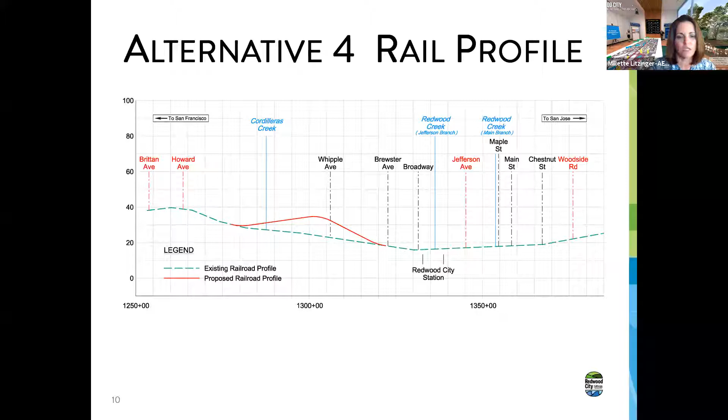And then how high? So this last slide shows what the height of the railroad is at each of the cross streets for the 4 alternatives. It's summarized in this table.

You can see the rail height is the difference between the new proposed track and the cross street below. In alternative one, for example, the tracks are elevated throughout the whole city, so you can see the heights range from 23 feet at Whipple to 6 feet at Chestnut.

Conversely, alternative 4, which is Whipple only being grade separated, you only see that as having a 9-foot increase, and then all the other cross streets have no change in height, so there's 0.

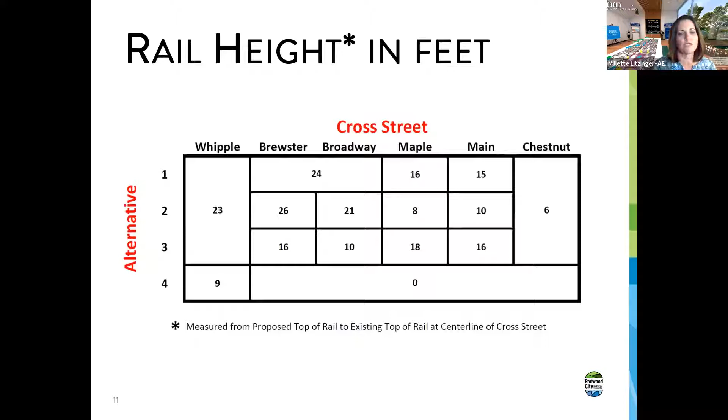I just had one more slide. Sorry, Eileen. Just wanted to highlight that a lot of the 4 alternatives we're looking at do introduce the idea of closing some of the streets.

I just wanted to add one thing. The profiles that Millette is showing, and also seen in the VR room, those are exaggerated 50 times, so they look like roller coasters, but those grades are generally very flat. 1% is the maximum we're using.

So when you're riding on that train, you could barely notice a steady climb. It's a long, steady climb. That's how we get the elevation differences that she shows on that table.

Thanks, Peter. Spoken as a true engineer. I love that. So thank you for that.

While we have this slide up, I think it's a good time to ask Millette another question that's come in. As I mentioned, we're going to be posting additional traffic information, but there's already some information. There's been a question asking where can I find more information on the traffic impacts? So Millette, can you share how that might be done or where that is in the virtual room since we have that open?

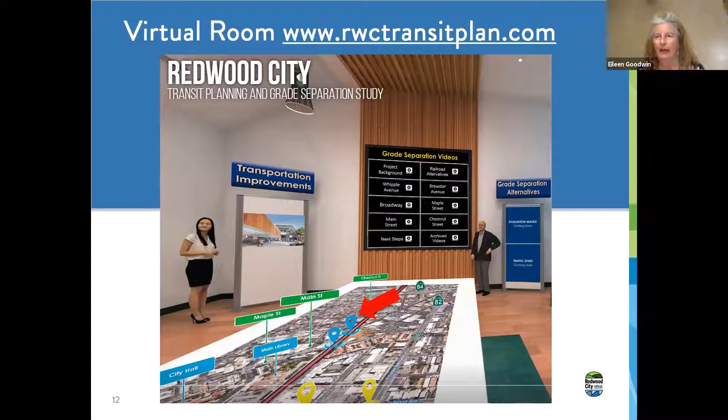Yeah, and this is a screenshot, so I'm going to stop sharing here and ask Peter to start sharing the virtual room link there too, so we can live click on some of the exhibits there. But as he does that, I can start to explain.

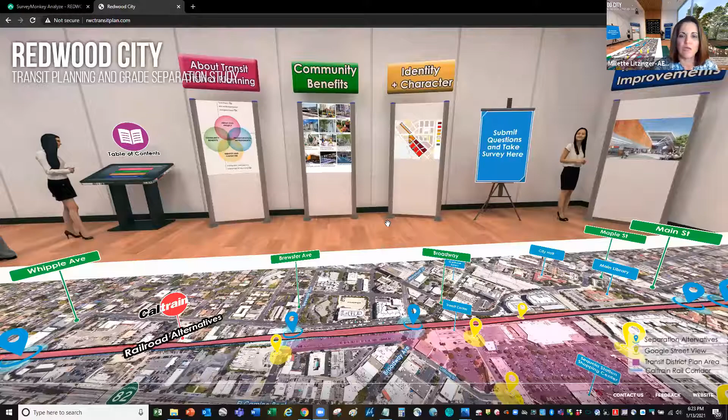We do have information on what the traffic impacts would be as it relates to the existing traffic volumes. And when you go in the virtual room, Peter's going to pan over here to the right, and then you can see an easel board over here where the grade separation information, not only our videos, but some of our documents are starting to be populated.

He can click on the existing traffic link there. And even though we are working on the traffic analysis for the 2045 volumes, we'll update that in this room prior to our next Q&A session, which will highlight the results of the traffic analysis related to the future year of 2045, whereas this one just relates to the existing traffic volume counts.

I'm probably going to have you leave it there, Peter, because I think that probably will also be our next topic. Good. Yes, I'm starting to get some feedback from our Q&A function.

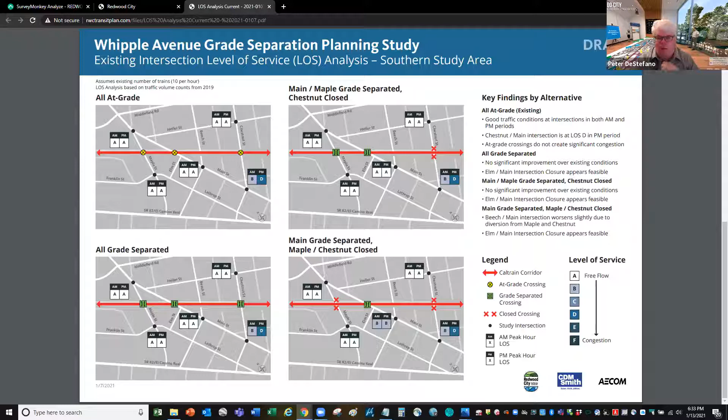Yeah, we have some options, and you can check it out in the VR room at Chestnut, at Maple, and at Broadway. Take a look at the exhibits there, and you'll see, actually at Brewster too, that we're developing as we speak. But yes, there are some cases where we're showing what-if scenarios of pedestrian and bike crossings only.

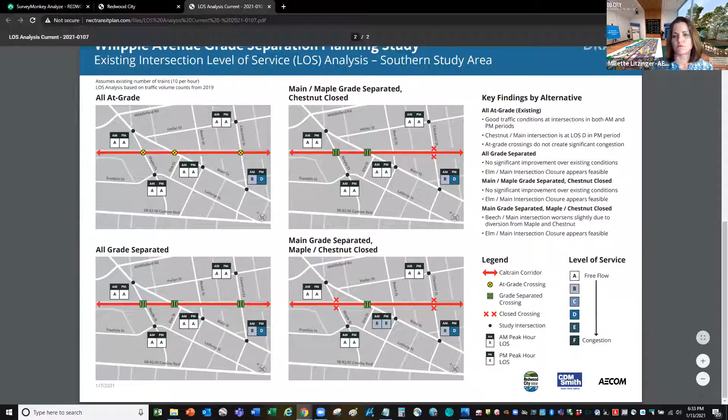Great. Okay, so Peter, can you show us one of those on the website? Yeah, that would be great. Sure, let's take a look. Let's look at the one at Chestnut. rwctransitplan.com.

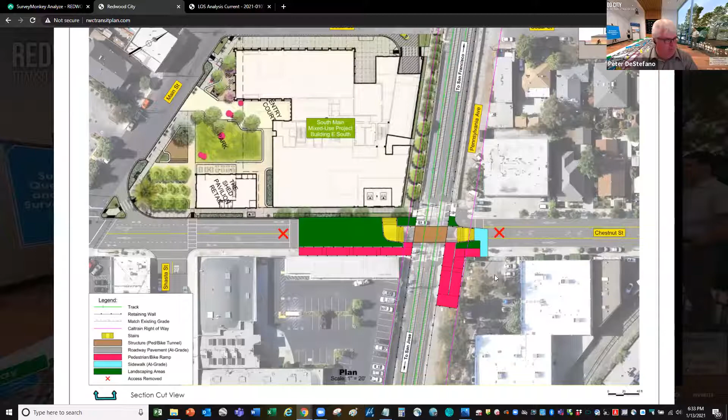So here is the one at Chestnut. This is showing a closure. The X is showing a closure for motor vehicles, but the red areas are the pedestrian ramps that descend down into an undercrossing, and the yellow areas are stairways that climb back up to street level. So that's one example.

Okay, a follow-on question that's also come from our audience tonight is, are there any plans for additional tunnels for pedestrian or bicycles only? For example, this person is suggesting Howard Street. So Jessica or Peter, somebody want to take that one? Yeah, I can take that.

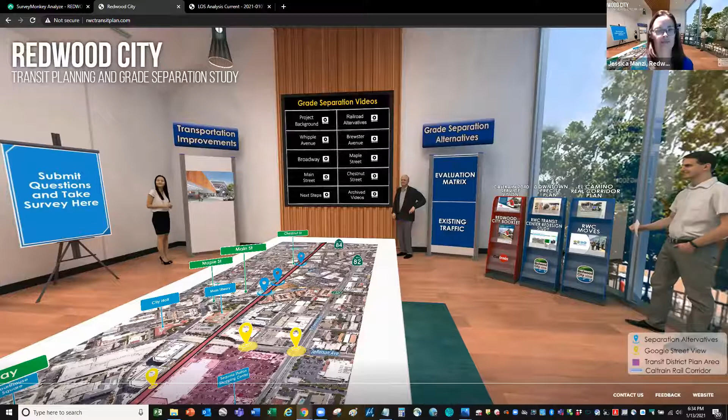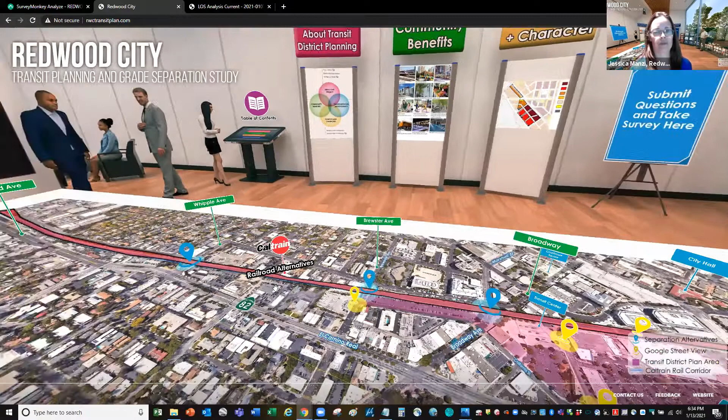So far our focus has really been on studying what happens at each of the existing 6 at-grade crossings. But we can explore the possibility of reconnecting streets that were previously closed at the tracks. These sort of reconnections are most likely to happen just for bikes and pedestrians rather than for all modes. So if there are locations that you think should be prioritized for that, please let us know.

You can email us at transitplan@redwoodcity.org, put it in the chat box. So far, we have heard interest in reconnecting Hopkins Avenue. And that's, in the scheme of things, probably one of the more feasible locations, just because most of the alternatives have the tracks elevated quite a bit at Hopkins, so reconnecting it would be less of an effort than in some other locations.

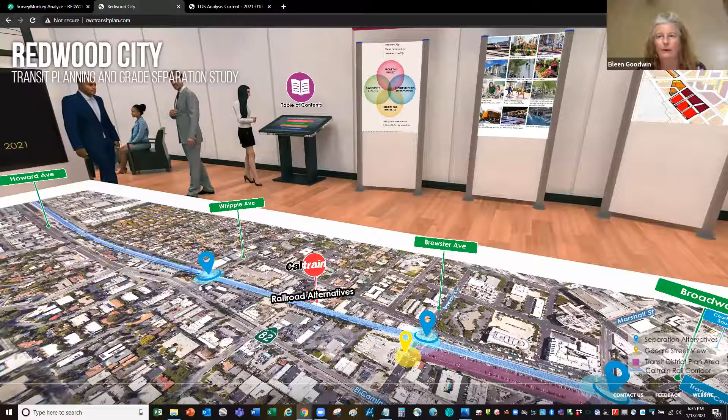Great, thank you. One of our other questions is, how are the alternatives being evaluated? You have a lot of combinations and permutations, so what process does the team use to sort through all of these different pros and cons, impacts and opportunities? Millette?

Millette, are you on mute perhaps? I don't hear you. Yeah, and can you repeat the question, Eileen? Yeah, the question is about how are all these alternatives being evaluated. There's a lot of combinations that involve opportunities in some cases or impacts in others, and how do you as a team sort through all of this information? The question is, how are they being evaluated?

Yeah, thank you. So we've had many stakeholders involved in developing the evaluation criteria that we're going to use to evaluate the 4 alternatives that I outlined. And it looks like Peter's already jumped ahead and is showing you that evaluation matrix and where it is on the site. In the first column, you can see it lists the criteria that we have developed, and there are several categories that begin with traffic circulation, and it has environmental and socioeconomics, etc. as you go down the chart.

And then I wanted to note that based on responses we got from our previous community survey, the first 3 criteria, which we've denoted with an asterisk, were identified in the survey responses as the most important criteria to the community, so we put those at the top of the table. And then I wanted to highlight that we used a bar graphic to indicate which of the alternatives has the most improvements versus the most impacts. So if you look here—let me try to move this screen so I can actually see the chart, it's a little small on my screen right now.

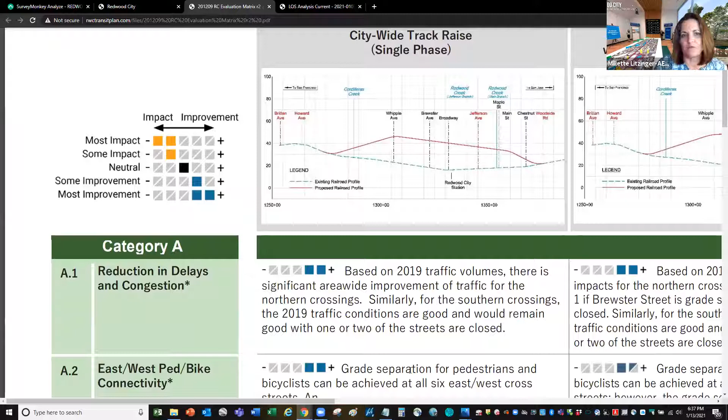And I was going to walk through maybe the first one here that is related to traffic. Thank you, Peter, for zooming in there.

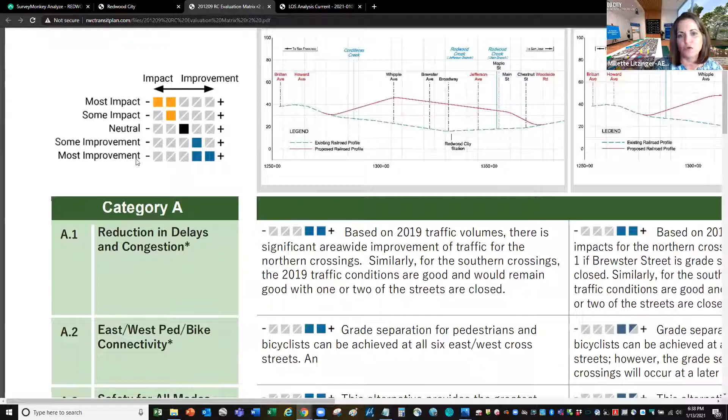So just to give you an example of the 4 alternatives that we looked at, you heard from Bill that adding grade separations does improve the conditions significantly throughout the city. So we ranked this alternative as 2 blue squares, which mean that was the most improvement. But as you scroll to the right and look at the other alternatives, we did also rank 2 and 3 very similarly because adding the grade separations in the north end of the city really does improve the traffic situation.

And then the last alternative, number 4, where we were looking at grade separating Whipple only - this does have traffic impacts, and that's because if we were only grade separating Whipple, then we would also need to close Brewster and Broadway. And that's recommended because of the 4 track that would be at the station, and that would result in a lot of traffic on Whipple with those 2 closures in the north end of the town.

So right now, what we've put - this example that I've walked through - is related to the existing traffic volumes. When we complete our analysis of the 2045 scenario, we'll also add those to the mix of this evaluation matrix.

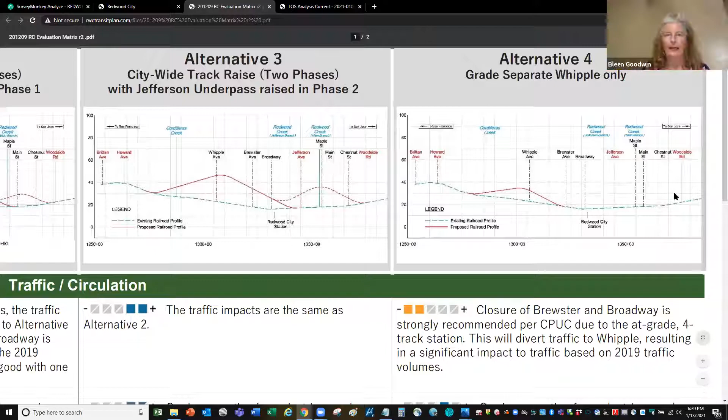Thanks, Millette. We have a question here about why can't there be a grade crossing at a 4-track segment or station? And that sounds like a bit of a Caltrain issue. So Melissa, could you take that one?

Yeah, no problem, Eileen. So while there's no regulation which specifically prohibits 4 mainline tracks at an at-grade crossing, certainly modifying the crossings to add 2 mainline tracks would have to be authorized through a formal application process to the California Public Utilities Commission, the CPUC, who would very likely protest 4 mainline track at-grade crossings for obvious safety reasons. So it's really not seen as best practice.

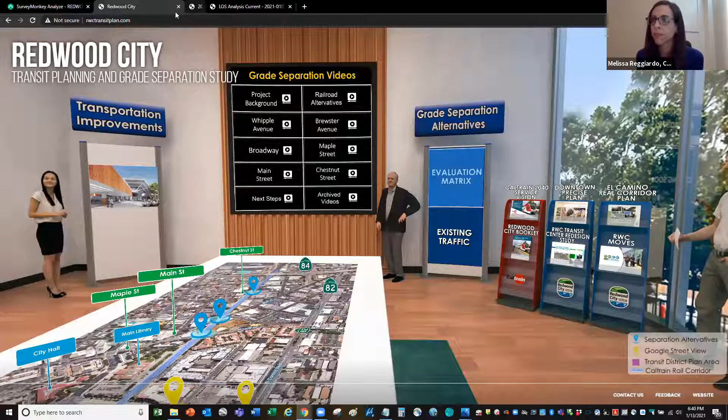Because it takes too long to cross over all of that real estate if you're on a bike or a pedestrian or a car? Yeah, especially in a busy downtown area, yes.

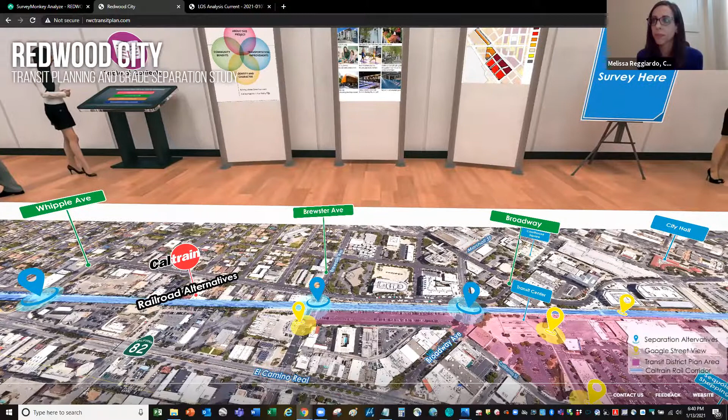Great. Well, while I've got you, and maybe this is a question for you, or maybe it's a question for Jessica - there's a question that's come through tonight: there's been some talk about a possible station at Redwood Junction. Is that only for a possible future Dumbarton rail project, or might Caltrain be routed through Redwood Junction? So if someone could take that question, that would be great.

So the Redwood Junction question - Jessica, do you want to start and I'll add in, or do you want me to start? I think you start and I'll add in if there's anything else. Okay, and Eileen, can you just state the question for me one more time so I'm sure to answer all aspects of it? Yes, absolutely. So the question is, there has been some talk about a possible station at Redwood Junction. Is that only for a possible future Dumbarton rail project, or might Caltrain be routed through Redwood Junction?

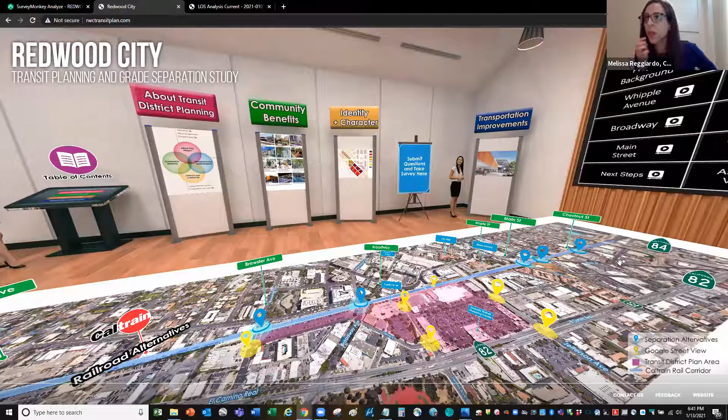Okay, so this issue has come up for Caltrain. And so what it looks like is that Redwood Junction would likely be looked at as an infill station separate from this grade crossing analysis. There's a variety of places up and down the Caltrain corridor that have come up for this reason. This is one location that we will be looking at.

And yes, so I guess to answer the question directly, it could also be a Caltrain station in addition to a Dumbarton station, but TBD, work needs to be done. And we also acknowledge at Caltrain that even if an infill station were not to be built, there is a lot of room to improve connectivity in the North Fair Oaks area. And so that's something we're especially interested in looking at, especially in regard to our new equity policy. We want to make sure we're giving good service to areas like North Fair Oaks, which has been historically disadvantaged.

And with that, I'll throw it over to Jessica to add anything that I may have missed. I don't know, I think you nailed it.

Yeah, right. Well, I'm going to switch to a different topic. We are getting some more questions through the chat related to costs, but I've got some other topics that are in front of that one. So what are the typical impacts during construction when you're constructing a grade separation project? And Peter, I know that you've got experience with that, so I'm going to throw this one to you. Yeah, thanks, Eileen.

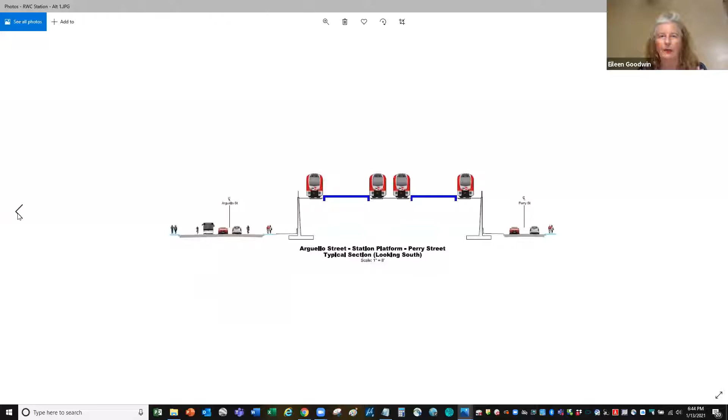And are there extra things that we should be aware of that are choices to that? So Peter, if you could speak to whether this is a grassy hill or more permeable, or how you're thinking about this. Yeah, I got some pictures up on the screen here.

So in most cases, the rail corridor, because it's developed on each side of the corridor, we'll have a retaining wall on each side to kind of narrow up the width, because there's really not room to put in a nice gently sloped embankment with landscaping.

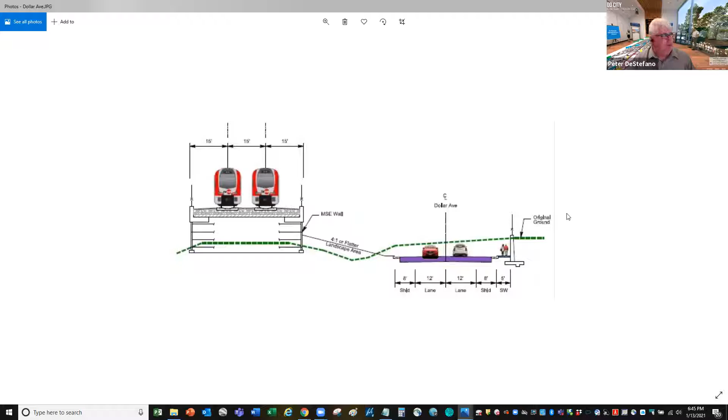The reason the walls are typically done versus, let's say, a viaduct structure or just a regular structure, it really comes down to cost. It's a lot more economical to put it on a retaining wall versus an open structure. So we've got to strategically determine where we're going to place those structures, and of course those will be at the streets. On occasion, we'll have them potentially for, we were mentioning before, like Hopkins, for example - that could be also a location where there's a structure or an undercrossing structure for peds and bikes.

Okay, thank you. And you mentioned that word cost. I know we've got a question in the hopper, but there's a few in front of that, so I just want to let that person know we'll get to the cost question, but we've got this question in front. And we did start to talk about this with some of the earlier questions, but here's a question: how can the project improve connections for people walking and biking in Redwood City?

I think this is a little bit broader than the original question, which was somewhat specific to a location. Jessica, was there anything you wanted to add to this? Sorry, I always forget to unmute.

So I think my answer is pretty similar. Again, wherever we're proposing any full closures, or where we need to have a full closure for safety purposes, we're going to do everything we can to make sure we maintain connectivity for people that are walking and biking. But as I mentioned before, if there are locations where there's not an existing connection that you think would really benefit from one, let us know, because I think there are locations where there could be potential for reconnecting streets that are currently severed by the railroad tracks as a way to increase connectivity for people walking and biking.

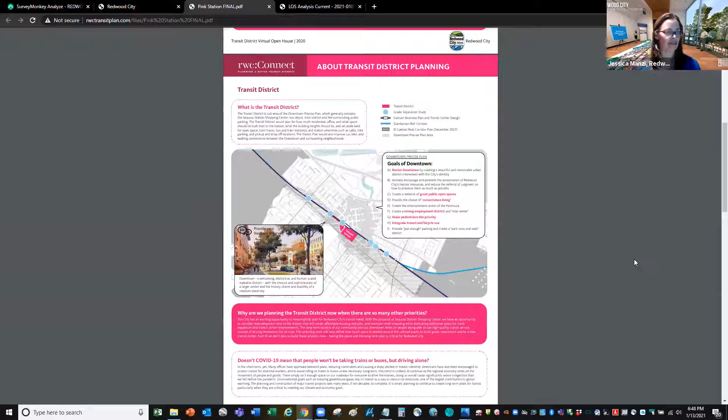Great, thanks for that question. Peter's already over in the VR room showing where you can find more information about the umbrella transit district planning effort and how what we're doing relates to that. To give you the Reader's Digest version, the transit district plan is going to define what type and how much development is going to occur.

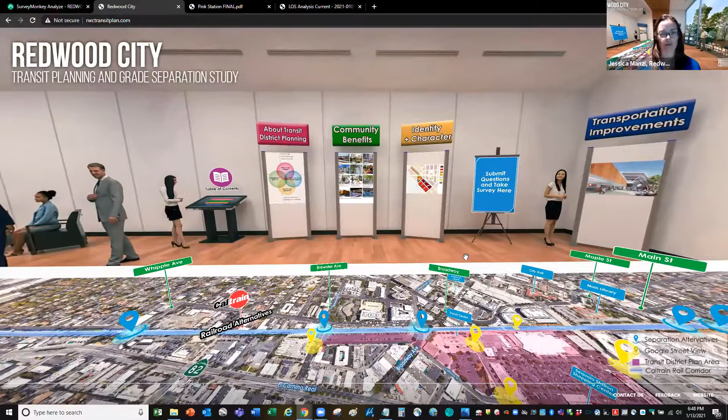The station area is a little bit larger than that, also looking at where future streets might be, and defining what space is needed for a new train station and bus depot. As we identify a preferred alternative from the grade separation study, that's going to tell us where the new station is going to be located, how people will get to the station platforms, and where people will be able to cross the train tracks. This includes everybody, whether you're walking, driving, riding bikes, or anything else.

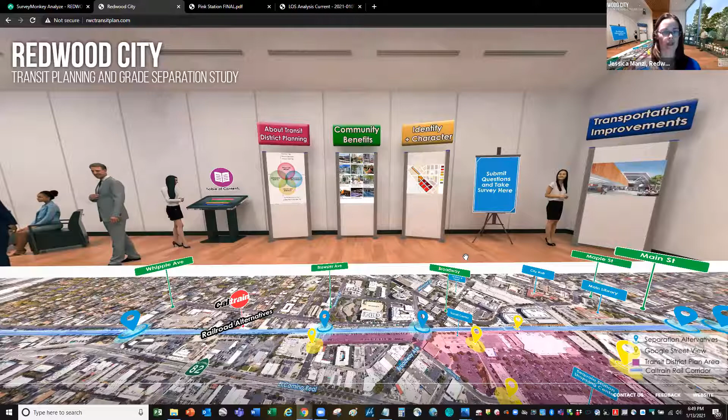So this information is going to be incorporated into the transit district plan. As you said, we've got this series of boards for the transit district plan with the different components in detail. If you click on the transportation improvements boards, maybe get back out of there to the blue station, there's a lot of cool things to look at here.

One of my favorites is the multi-track stations. You can learn more about Caltrain's plans and Dumbarton plans, but we also have this board that shows examples of what different multi-track stations can look like. I think this is a really fun place to spend some time thinking about how we would re-envision our transit station in downtown and make it a really engaging, vibrant place, a way to really welcome people to Redwood City. So take a look at that.

You'll get a better idea of how this fits in, but it's very much coordinating with this broader planning effort as we progress the grade separation study.

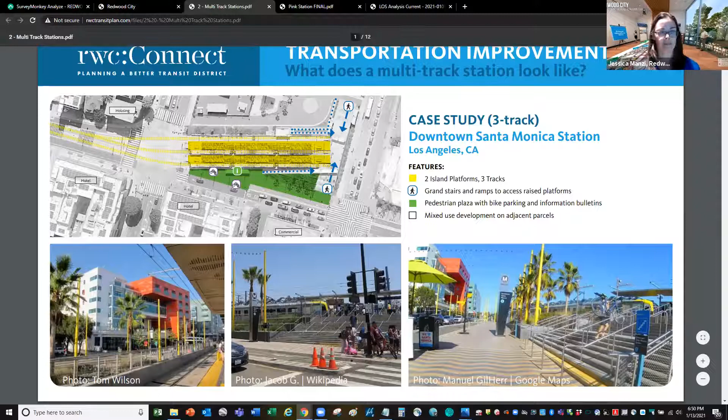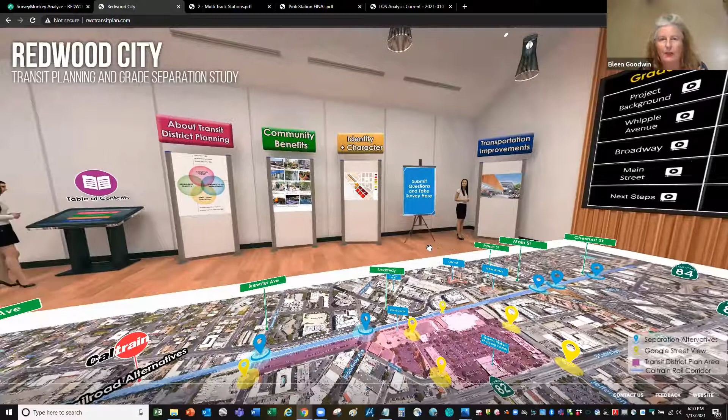Thank you. So Melissa, I've got a couple on deck for you. One is related to the fact that Caltrain's been involved with a lot of grade separation projects, and they're wondering if you've learned any lessons. Are there lessons learned and mistakes maybe made that could be corrected by the time you're potentially building something in Redwood City, or is there anything you can speak to that would relate to lessons learned?

Sure. I think there have been many lessons learned from grade separation projects, especially those constructed in recent years. Some notable considerations include addressing utilities very early in the project development process, as they can often cause construction delays, and comprehensively considering multimodal access and bicycle and pedestrian connectivity, specifically in grade separation design.

Especially because, as we consider these grade separation designs that propose to close streets and remove crosswalks, this becomes pretty critical to make sure we maintain at minimum, and hopefully enhance, connectivity, especially in downtown areas like Redwood City. And these considerations are, of course, important not only for the construction phase, but of course the final condition.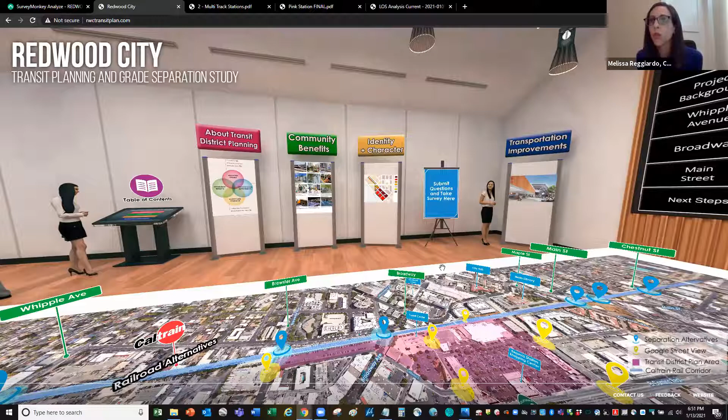I think we've also learned about the importance of thinking about the impact to the urban environment in terms of the need for retaining walls. We understand that retaining walls, while necessary, often inhibit access and connectivity. So how do we develop designs where this isn't a huge issue, or where we can avoid some of those barriers that we're often trying to eliminate in grade separation projects?

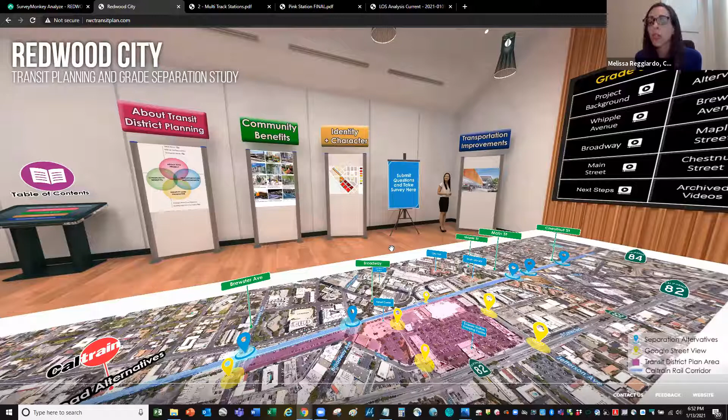I think we've also learned that we need to consider design that reduces the potential for vandalism, graffiti, and homeless encampments. And I think another really important lesson learned, and I think we've done a better job especially with our electrification project, is ensuring robust communication during construction, just making sure the community is well aware of our progress and any anticipated changes to the construction sites, so people can modify their travel behavior accordingly. So that's just a smattering of lessons learned, but there have been many.

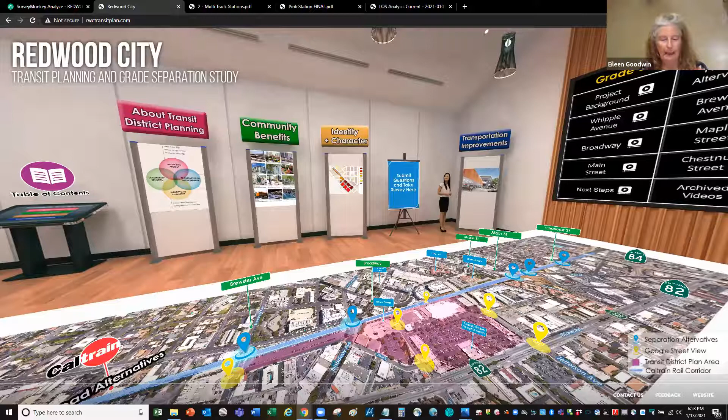Okay, thank you, that's a very good answer, a lot of lessons learned I think. So here's one that's just come in. It talks about Redwood City Moves, RWC Moves, and recommends a cycle track on Brewster and James. Are these coming with this project as safe routes to transit? So I think that's a Jessica question. Yeah, definitely, great question.

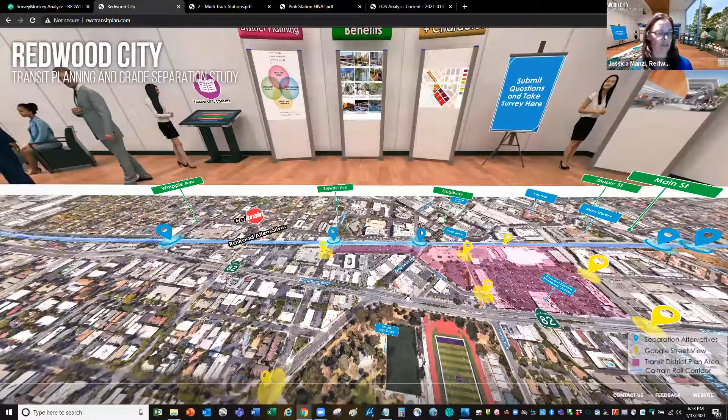So it's a little bit complicated, I would say. Certainly, if you look at the aerial map, thanks for pulling up the VR room there, Peter, you've got that pink shaded area.

So that's the limits of the transit district plan. And that's where we're going to have some sort of more detailed ideas about where the streets are going to be and what the streets look like. James is clearly within the limits of that transit district planning area.

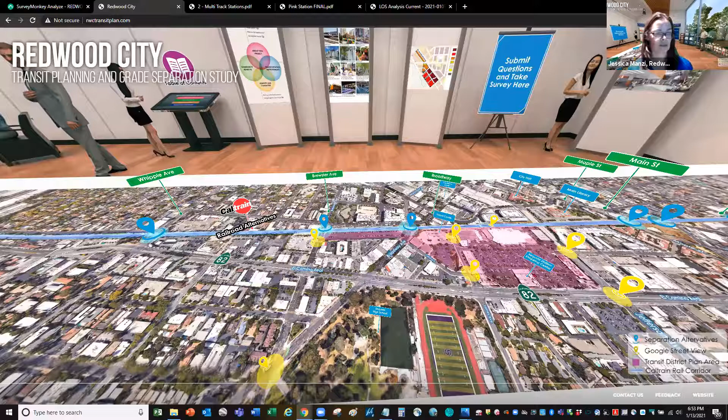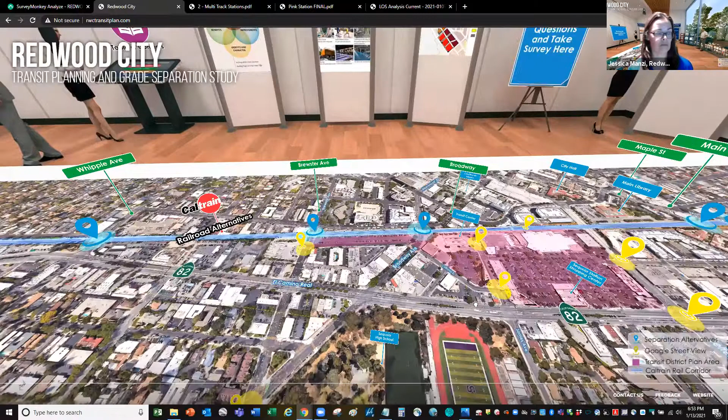And so we would expect to be considering cycle tracks within that area. I do expect that, as part of that plan, we may be identifying those connections to get to the transit district, but wouldn't necessarily be building those cycle tracks with the redevelopment of the project there.

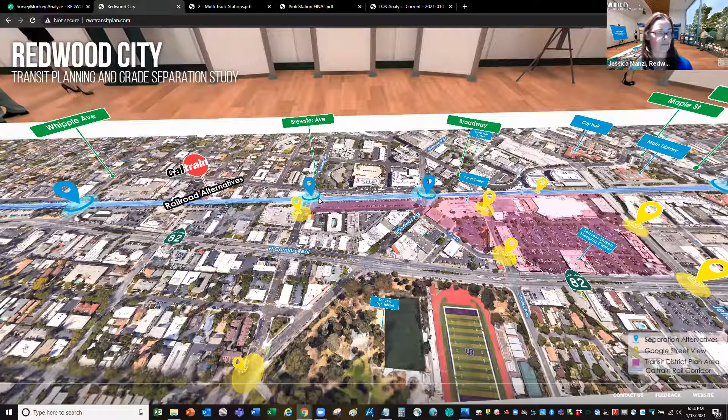On the flip side, if you look at Brewster, it's really sort of on the outer limits of the transit district planning area. And what's a little bit different is—actually, maybe go ahead, Peter, and click on the Brewster alternatives, and I can show you. It doesn't want to be clicked. Just go for maybe the first one.

But as sort of a big response, whenever we do these grade separations, we are looking at making sure we have better bike and pedestrian infrastructure where it makes sense. And because Brewster was identified to get cycle tracks, that is really what we're going to try and provide as part of the grade separation project.

So this is one of those areas where the response depends a little bit about whether you're talking about the transit district and any redevelopment that might happen as part of the redevelopment of the land that's there versus what might happen with the grade separation project.

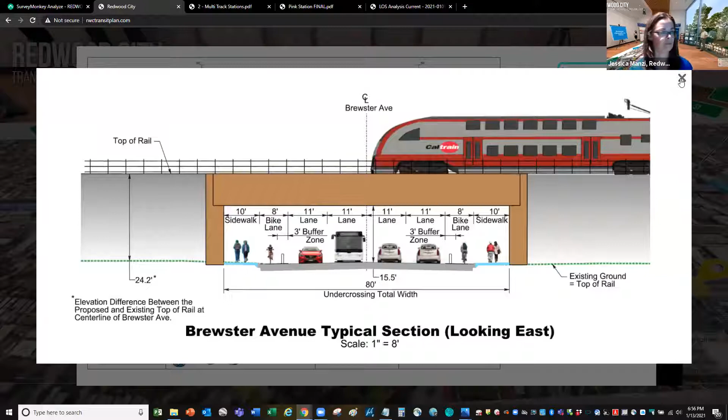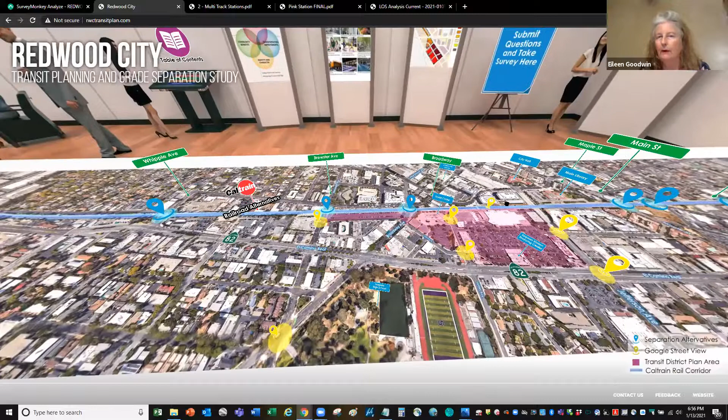Okay, thanks. So I've got two questions here. One that's just come in from someone who's just joined us, and I think we talked about a little bit of what this person is asking about, but also it's related to a question that had come in through the website, a bit of a broader question. So let me read all of the questions, and then I think really there's probably a combination of both Jessica and Melissa to answer this.

So just for our new attendees, Jessica is with the City of Redwood City. She is the transportation manager in the city's community development department. And Melissa Reggiardo is with Caltrain. She is a key planner for them.

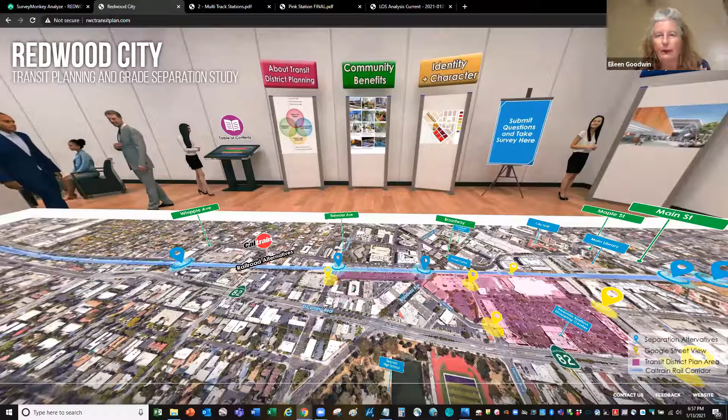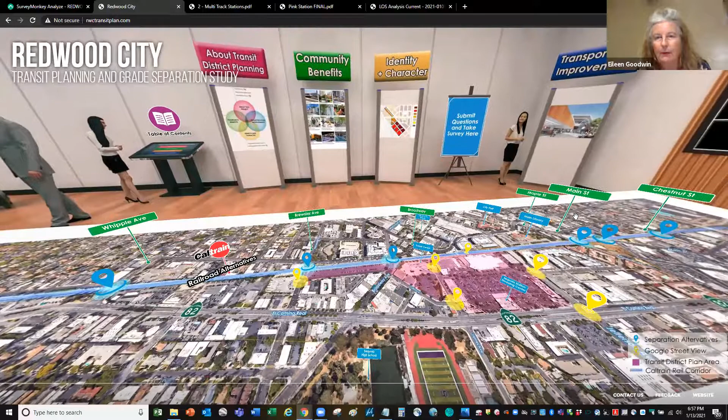So here's the question that's come in tonight, and then I've got a little bit of an add-on, so maybe we can answer it all at the same time. This person just tuned in, isn't sure if this question has already been asked, but are there alternatives that include a 4-track grade separation south of the current station, which could better accommodate future projects such as Dumbarton Transbay connections and increased Caltrain high-speed rail service by considering passing tracks? The concern is that the 2-track grade separations could or would inhibit that.

And then we had a question that seems a little bit similar that had come in through our previous work, and that is: why do the alternatives not include 4-tracking throughout the whole downtown? Seems like that's an important thing for the system's operational performance and resilience.

Thank you, team, good work. Don't be afraid to be bold, you have support. So I'm not quite sure they're the same question, but they certainly have a similar theme.

So Melissa and Jessica, how do you want to take those questions? Yeah, so let me start, and then Jessica, you can fill in any gaps that I leave behind. But I think this is a slightly longer—there's a long answer to this, so bear with me. But I'm going to try to break it up for you.

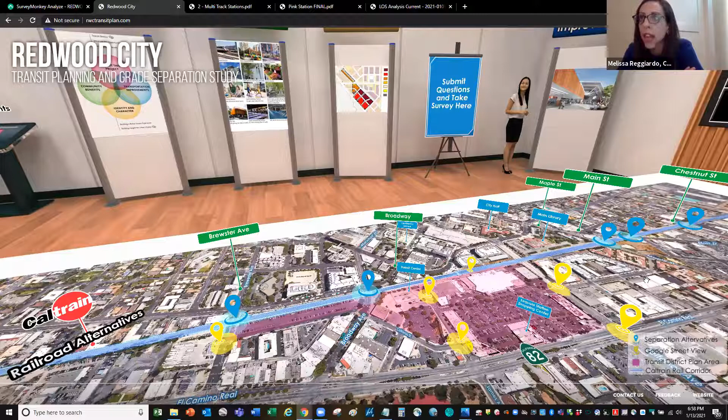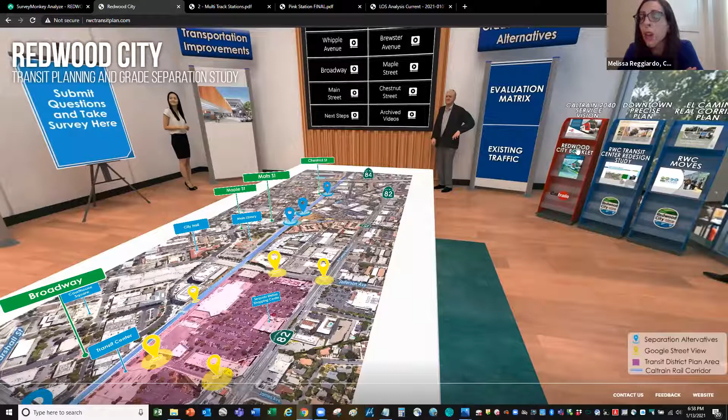The Caltrain service vision is based off what we call the moderate growth scenario, if you followed along to that process. It includes 8 Caltrain trains and 4 high-speed rail trains per direction per hour in 2040. So to support this level of Caltrain and high-speed rail service, we've identified a 4-track station as being required on the Mid-Peninsula to support primarily transfers between Caltrain Express and local trains.

Because of its supportive land uses and densities, downtown Redwood City, we think, is the absolute best selection for this station, for the 4-track station, which would bring more service to the city and increase ridership.

Building off this, the grade separation study takes the 4-track station requirement into account. The High-Speed Rail Authority has made no indication that they would like to stop at Redwood City, and therefore no such plans are included in the grade separation work, and a Redwood City station is not reflected in any agreements that Caltrain has with high-speed rail.

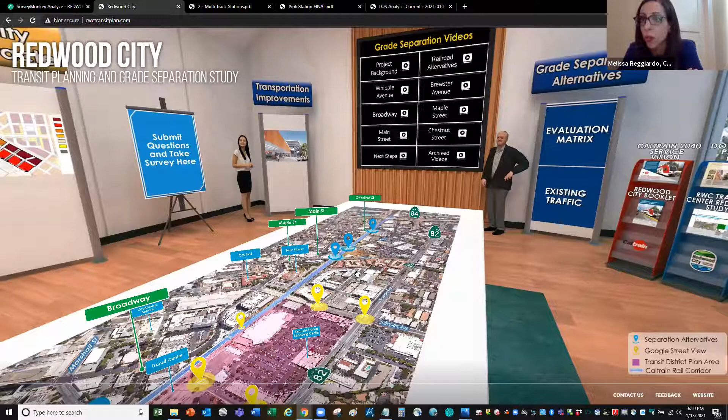So that's sort of the first part. I also think it's worth noting that if you followed along to the business plan process, you'd also know that there was a high growth scenario that was not adopted.

However, when our board adopted the moderate growth scenario as our identified service vision for 2040, they asked staff to not preclude the high growth scenario. What does it mean to not preclude? It really means don't make it a lot more difficult or a lot more expensive to implement the high growth scenario at some point in the far future.

So the high growth scenario includes 12 Caltrain trains and 4 high-speed rail trains per direction per hour, and it requires a lot more infrastructure to make that happen. That infrastructure actually spans from north of Hayward Park Station in San Mateo to south of the Redwood City Station.

And because that span of infrastructure, which would be 4 tracks, is so extensive, it didn't really pan out in terms of a business case in the Caltrain business plan. So therefore the Caltrain business plan didn't necessarily support the implementation of the high growth scenario, and that's why the board adopted the moderate growth scenario as the preferred vision.

So while staff can't preclude such infrastructure, it doesn't necessarily mean we're actively planning for it. We recognize that the high growth scenario would really only come to fruition far into the future, and with other major regional projects like the second Transbay Tube, for instance.

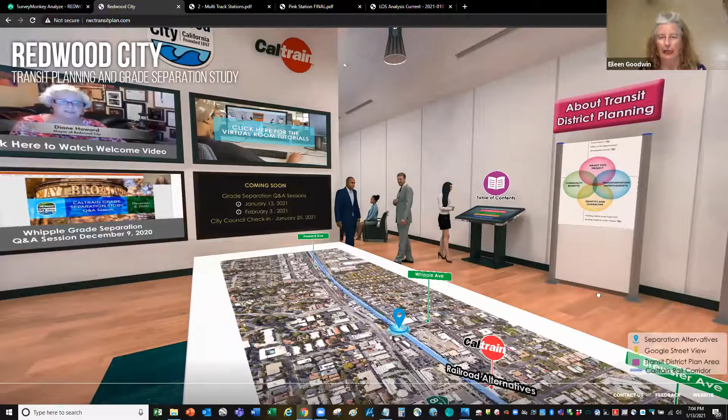Let's move on to the next question, related to quiet zones. This was also a topic at our pre-holiday meeting. The question is, how do we get one put in Redwood City? Can we? What's the process? Jessica, I know you've looked into that as our city transportation manager.

Yes, quiet zones are a pretty complicated topic, so this is a bit of a long-winded answer. They can only be created by an agency like Redwood City that has authority over traffic control and enforcement at the crossings—so that's us, not Caltrain. In order to establish a quiet zone, we have to implement FRA-approved safety measures at each grade crossing within the proposed quiet zone area.

These quiet zone crossings must have flashing lights, warning time devices, power-out indicators, and gates that create crossing closures when a train travels through. Additional measures may include upgraded four-quadrant gates as opposed to standard two-quadrant gates, concrete medians, street closures, and one-way street conversions.

Even with all these improvements, it's still possible the FRA would not approve a quiet zone if they don't think the improvements would mitigate the loss of train horns warning people of an oncoming train. Fundamentally, train horns are sounded to let people know trains are coming, to keep everyone safe crossing the tracks. So what they're looking at is whether these modifications make the crossing safer than if the trains were sounding their horns.

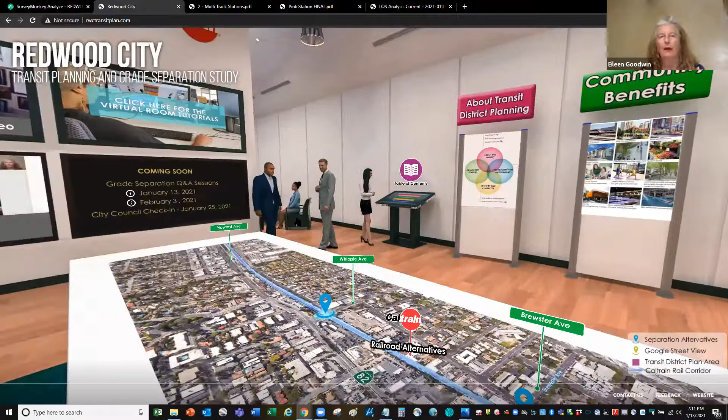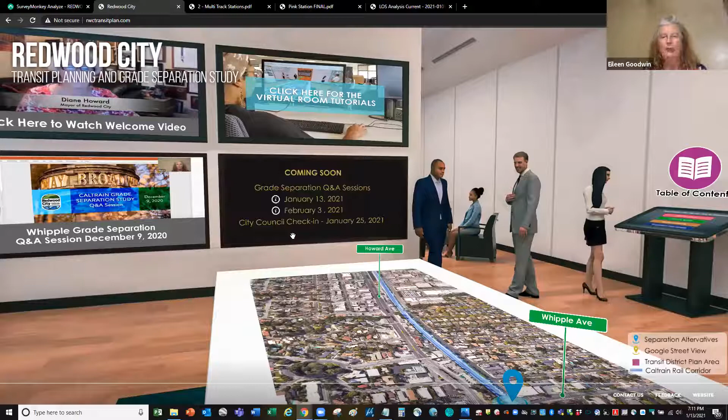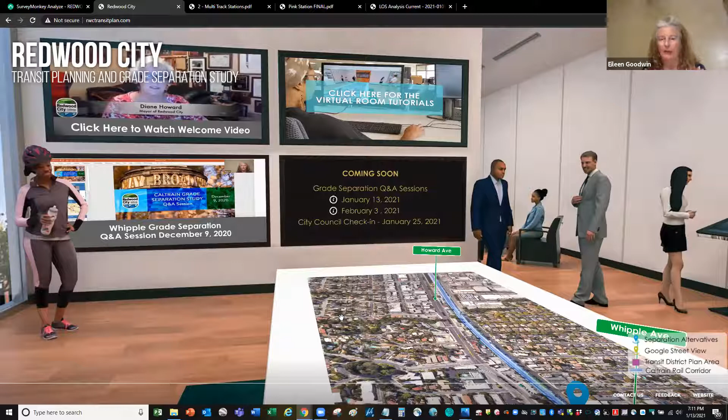We do believe that this meeting on February 3rd will have a heavy focus on traffic and traffic impacts, and maybe some new traffic patterns, but that doesn't mean it has to be the only focus. So we will be continuing to take questions through the website and incorporating them into our meeting on February 3rd.

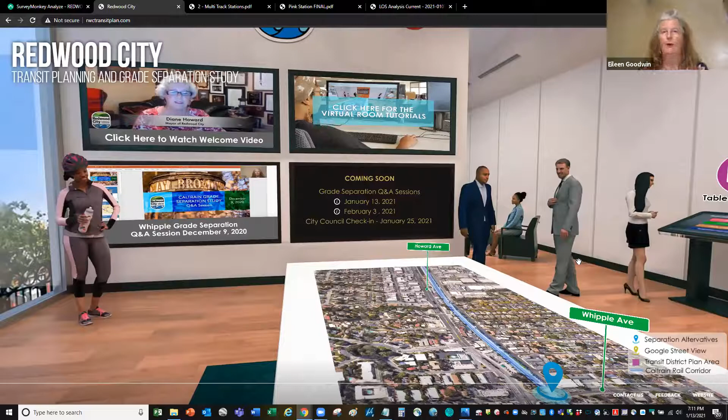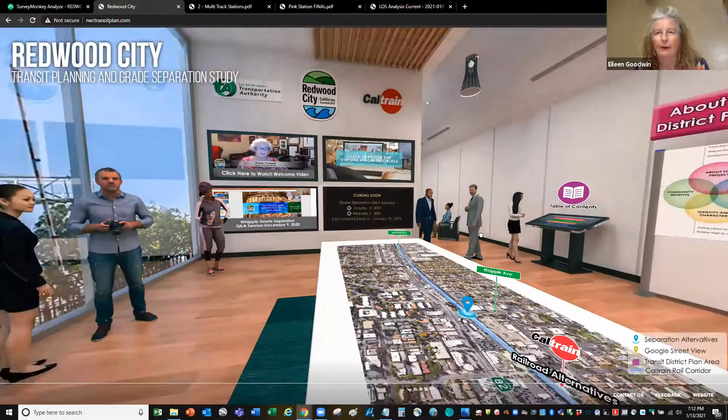Okay, I do have a new question: if you close Brewster, that means diverting traffic will travel north on Arguello Street to use Whipple Avenue, causing more traffic congestion on Whipple, and drivers will cut through Stafford Street to get to San Carlos. We already have an issue with drivers speeding on Stafford during the evening rush hour. Please install a stop sign on Stafford and E Street.

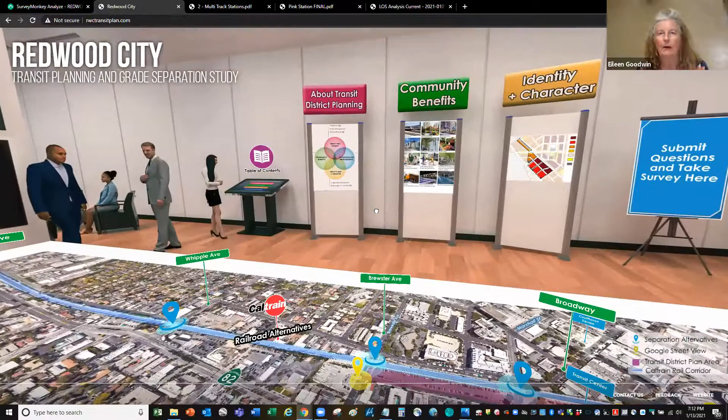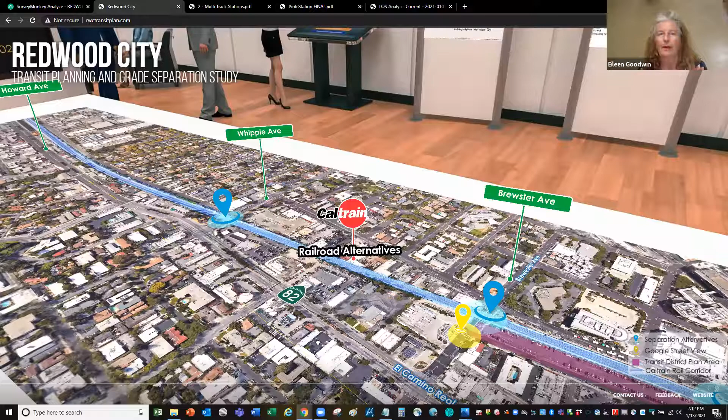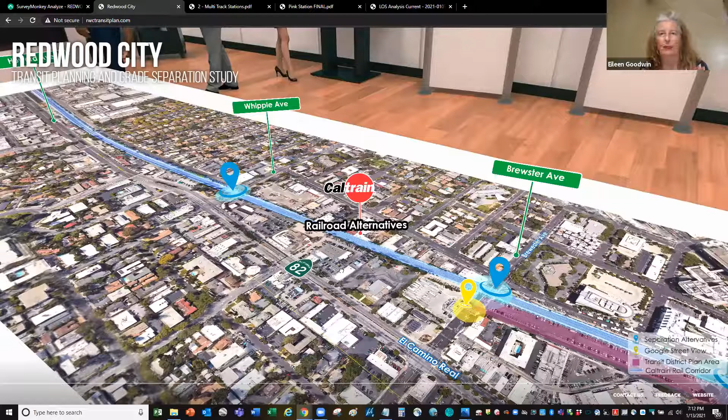I'm going to hand that over to Jessica to see whether that's something you're already aware of, and also a reminder that this is the type of thing being looked at by our traffic consultant, Bill, and we'll be able to follow up if we don't have a thorough answer this evening. We'll be posting Q&As online as well as doing a deeper dive on February 3rd. But let's see if we can get some answer to this question tonight about the potential for a Stafford and East Street stop sign, and the cut-through, and whether the diversion would actually use some of these streets in the neighborhood. Jessica, some thoughts on that?

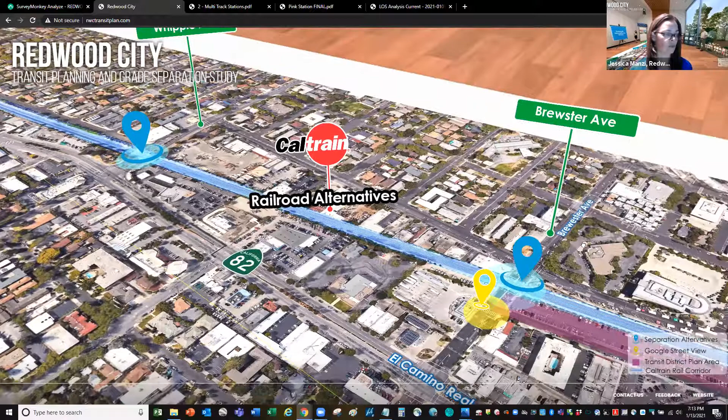Sure, and thanks for zooming in. Maybe I'll start with this — this shows Brewster and the cross streets. So if one of the alternatives we pick is to completely close Brewster, people coming down Brewster who aren't familiar with the area and wanted to cross the tracks there, if they're not able to — if they're heading north, they could go north and make the crossing at Whipple, or they may head south to cross at Broadway, if that's an option.

As part of the project, we wouldn't get into deciding if there are other traffic mitigations needed until we have a preferred alternative and understand its implications. To the extent there's a need for a stop sign today at Stafford and East Street, that's something I'm happy to evaluate. I'm not sure if we've evaluated that in the past, but we have clear state and federal standards for evaluating the need for stop signs, completely apart from the grade separation work.

Going back, if we did have an alternative where we were closing Brewster and that increase in traffic volumes necessitated putting in a stop sign for safety reasons, that would be done as a mitigation measure of the grade separation project. But Peter, maybe you could go over the traffic analysis piece.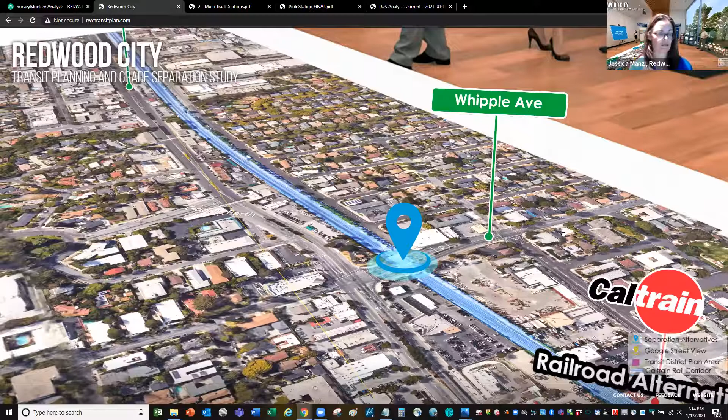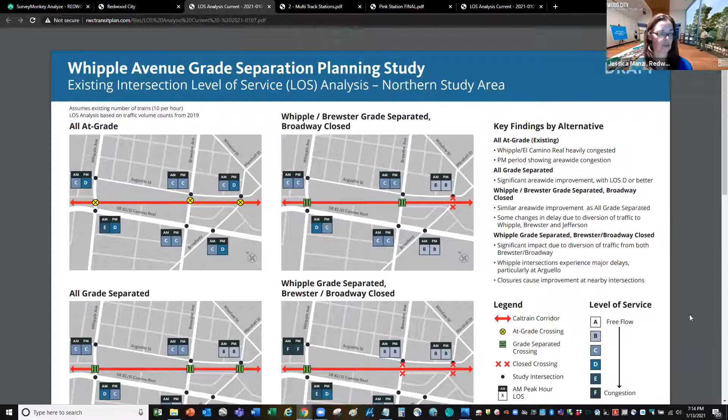I just want to show that there. So we do have some preliminary traffic analysis results that are in the virtual room and on the project webpage that talk about these options. So looking at, it's going to be the bottom right scenario.

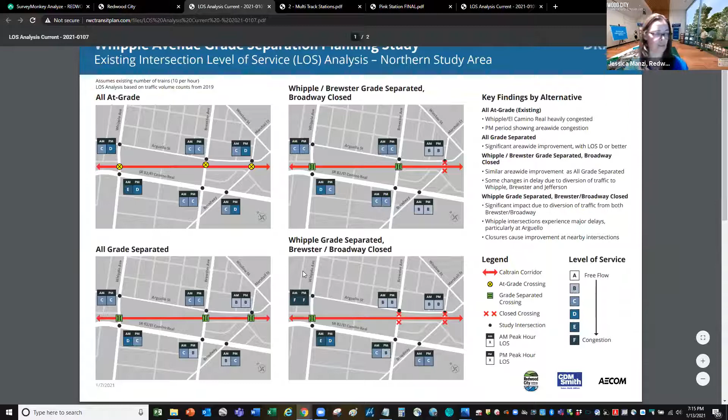This is one of the scenarios we analyzed: what's going to happen if you close both Brewster and Broadway. This is the scenario of what could happen for Alternative 4. What you can see is the level of service on Whipple at the two adjacent intersections, one with Arguello and one at El Camino, gets much worse than it is today.

That reinforces the sense that people are not going to cross there and will use Arguello to get up to Whipple. So we do see an increase in volume on Arguello potentially, or frankly, once the grade separation's done and the street is closed, it's also possible people will take completely different routes because they know they can't cross at Brewster. But it's not unreasonable to assume at least some percentage of them would go on Arguello.

So if we end up with an alternative that recommends that, we'd certainly be looking at whether there's a need to put in additional traffic control at intervening intersections to make sure they're safe and operate well.

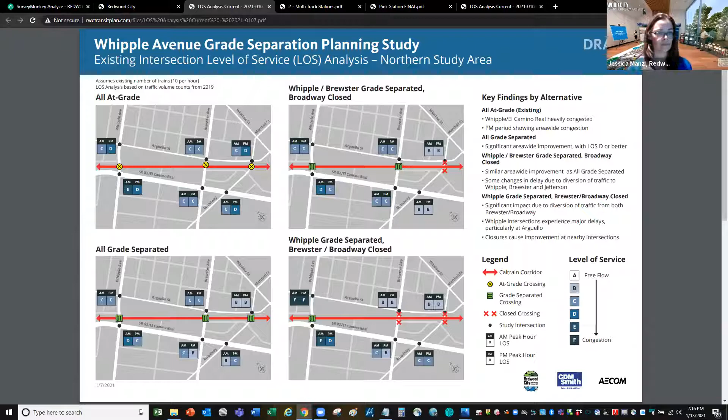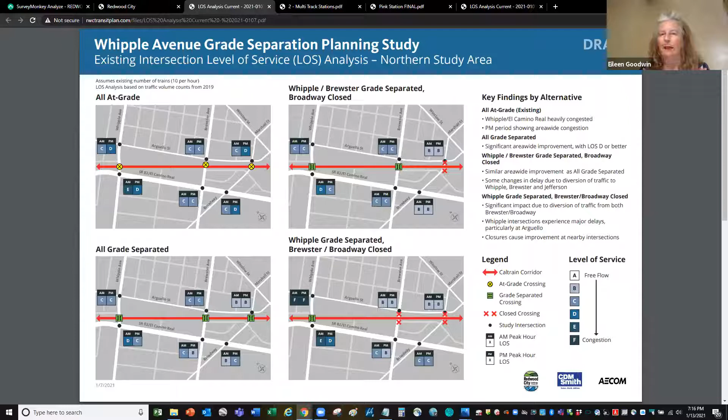Just as a follow-up, I noticed when some people were joining that the person who asked that question wasn't a beneficiary of our schedule question earlier in the meeting. I'm going to ask Millette to share that PowerPoint slide, and Jessica, if you could speak to that. I believe this person heard about the funding part, but let's talk about project development and how long from now that new traffic pattern might realistically be in play. It's certainly not going to be next week.

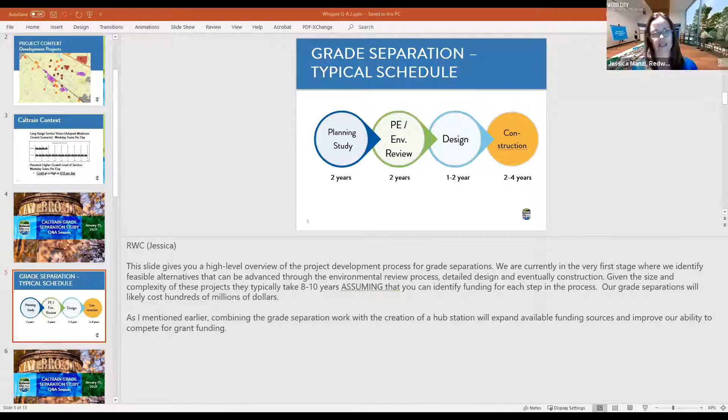There we go. Thank you, Millette. This again is a high-level overview of the project development schedule for a typical grade separation project.

Because of the size and scope of these projects, they're really mega projects for our area, taking 8 to 10 years to develop. So it would be quite some time before these changes are implemented, and who knows what the traffic will look like then. But throughout this process, as we get more information, we're going to continue to update the designs and alternatives to make sure any adverse impacts or unintended consequences are appropriately mitigated.